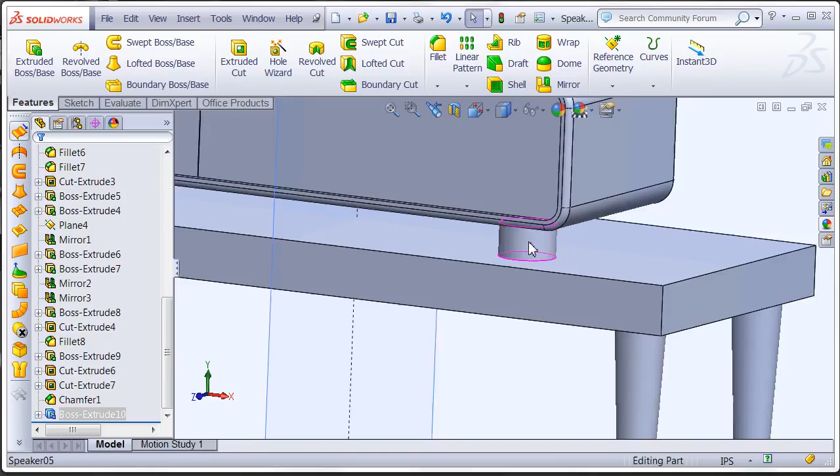All right, now that we have our receiver mostly built, we're going to finish the details. Let's fillet this leg, and we're going to mirror this to complete the rest of the ones under the body of the system. Go ahead, hit OK.

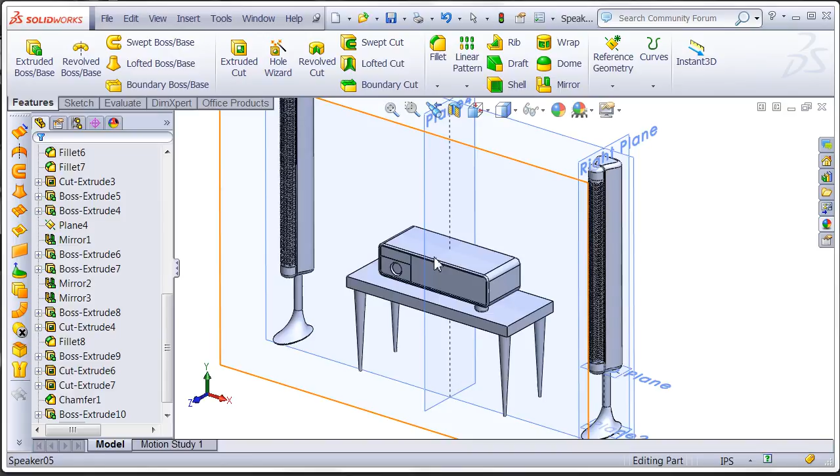Now we're going to mirror that off of the plane we made for the receiver. Go ahead and hit mirror. Pick your plane. Now we're going to do the body, not the feature of that fillet. Go ahead and pick that. Okay.

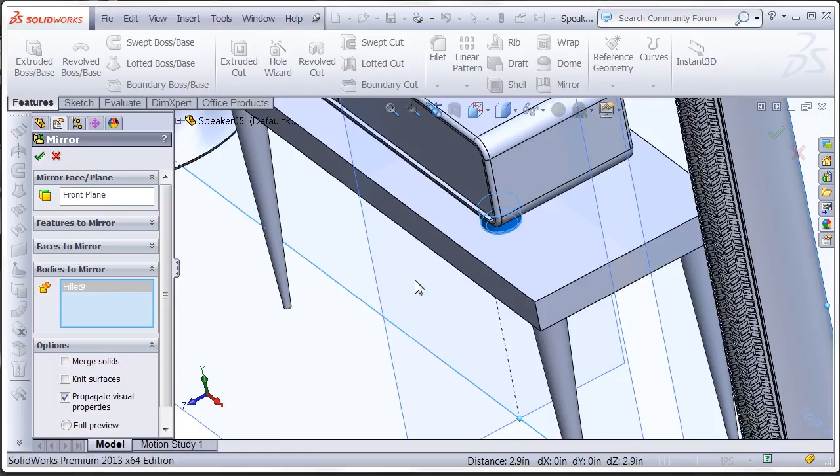And now we have our foot there. It looks like it's a little off. Okay, there's a way to fix that. We can always just delete that.

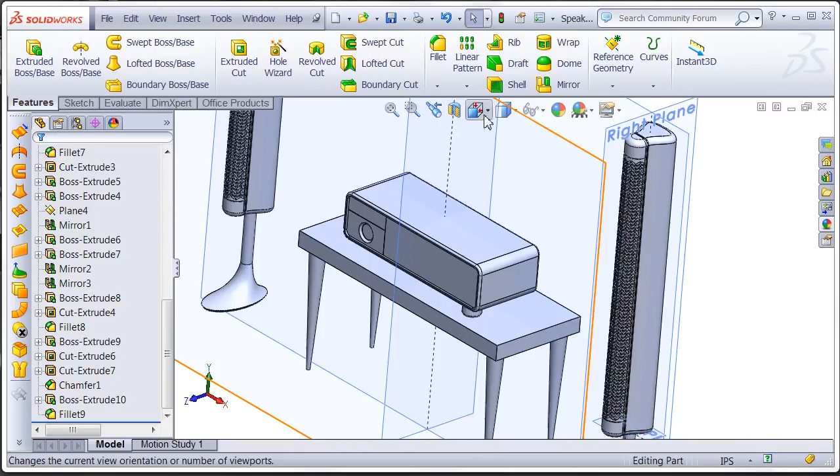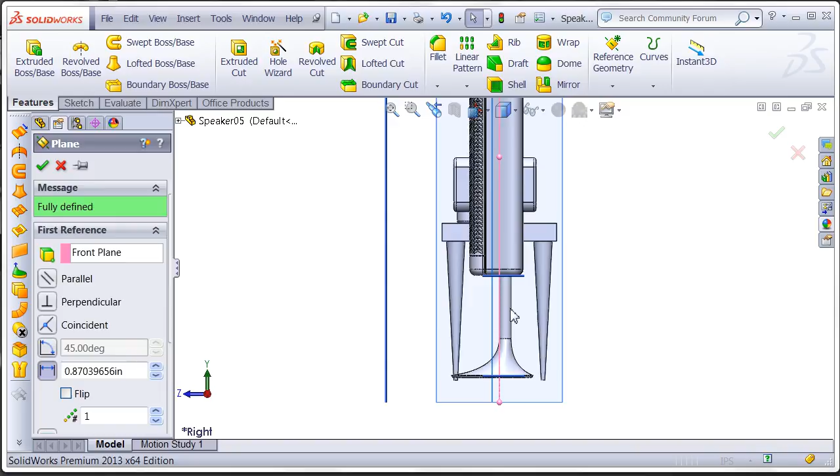Now what we're going to do is a side view. We're going to open up a second plane. Let's go ahead and grab one really quick. Pick a good center area of where that receiver is.

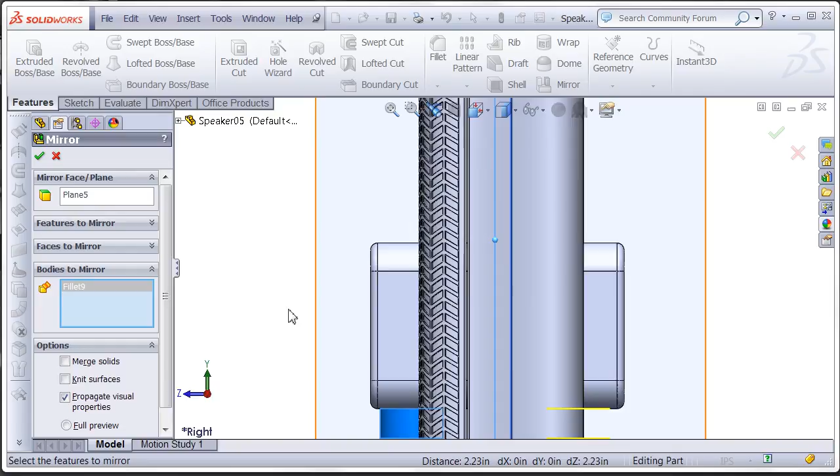That looks pretty good. Go ahead, hit your mirror feature again. Pick your body. And now it's nicely mirrored.

Now we're going to do that again using one of the planes coming from the side, and we're going to go into the front view to achieve that. So let's go ahead, open up another plane, again holding that control and just dragging over to where you want it. That looks pretty good.

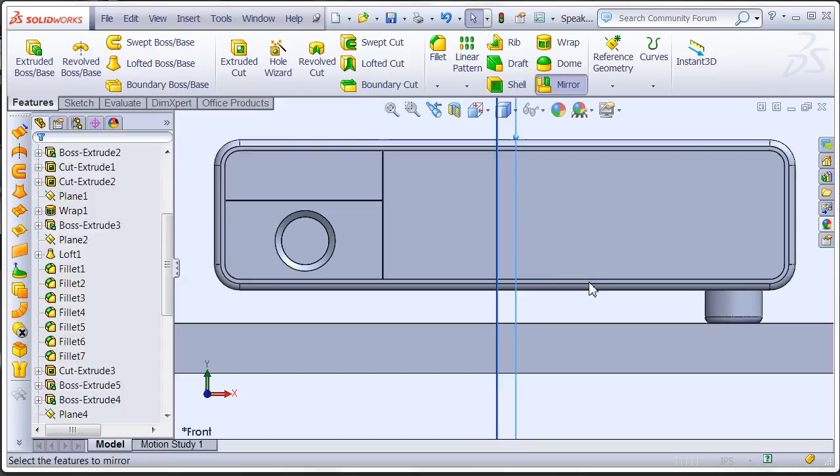Hit mirror. Now we're going to select both of these. And to adjust that, we can simply change that plane so we can make it look as symmetrical as possible. Let's go ahead and do that really quick.

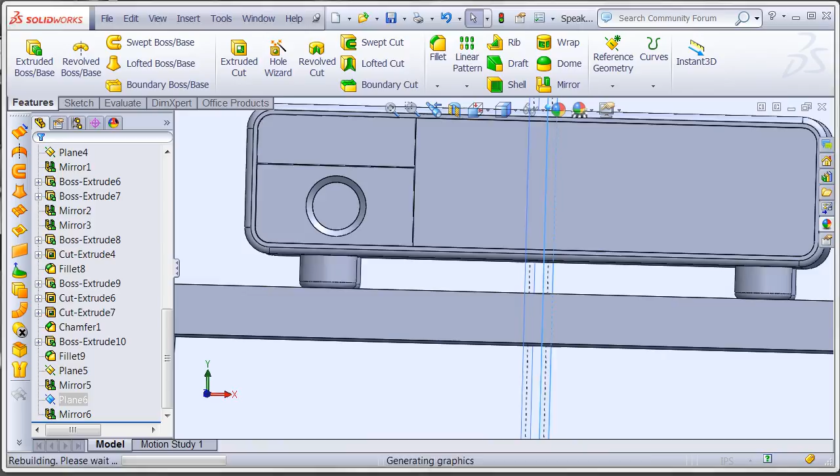All right, so let's minimize that. That looks pretty good. Yep, and that'll work.

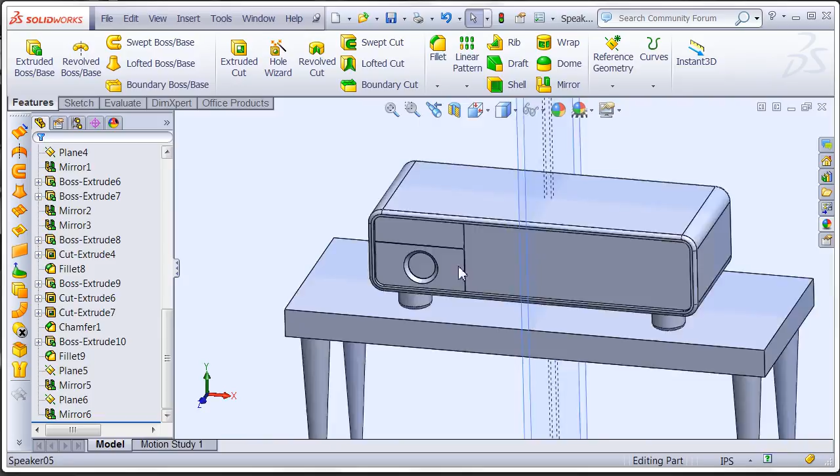Okay, so now we're going to extrude a knob here for the front. Go ahead and open up a sketch there. Again, using your same geometry that's right there, we're just going to offset right off of that. Hit OK.

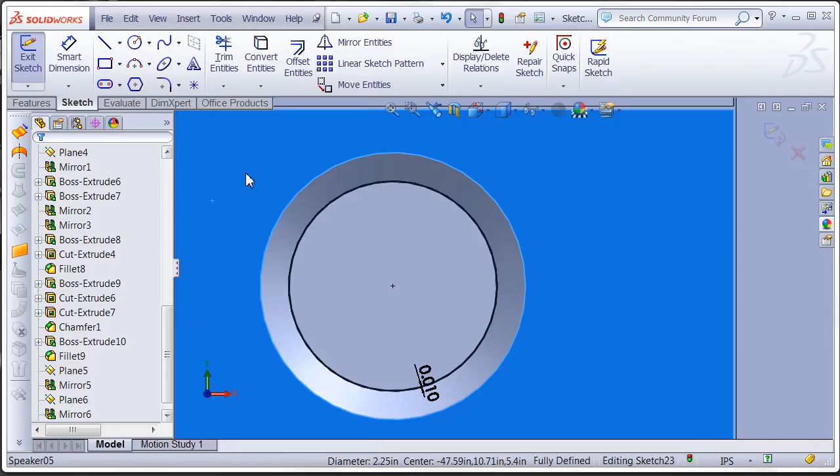And then we're going to use our extrusion button. Maybe a little bit less depth than that. And again, we don't want to mirror it. We want it to be another piece. So go ahead, hit OK.

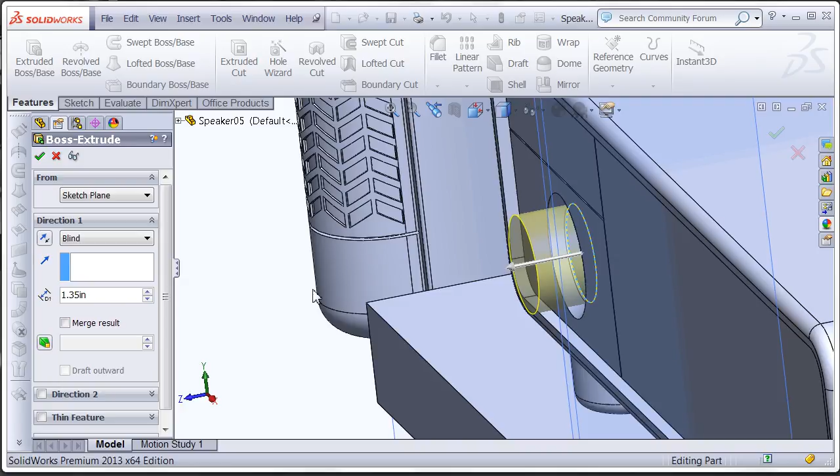Okay, now we're going to fillet that front edge. Maybe not too much. All right, let's hit OK.

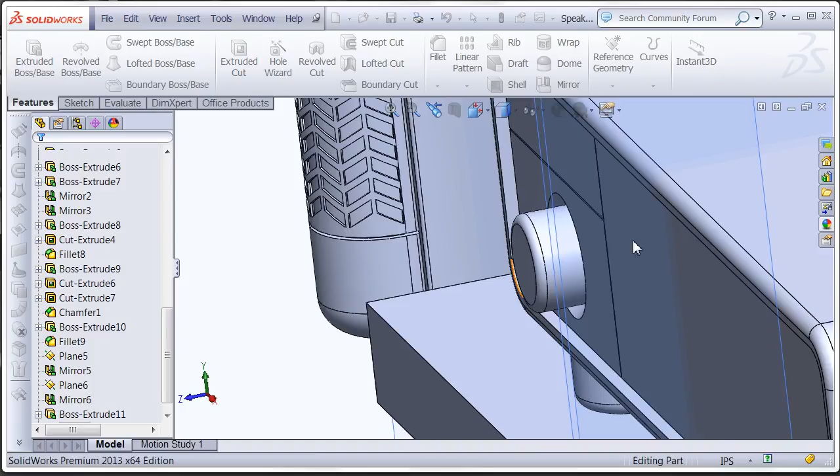Now we want to cut off that front. We want to make this two pieces. We're going to have a little grip area, and then the front's going to be separate material. So let's go ahead and use some of our references that are close to that. We're going to make a cut straight from using that tabletop.

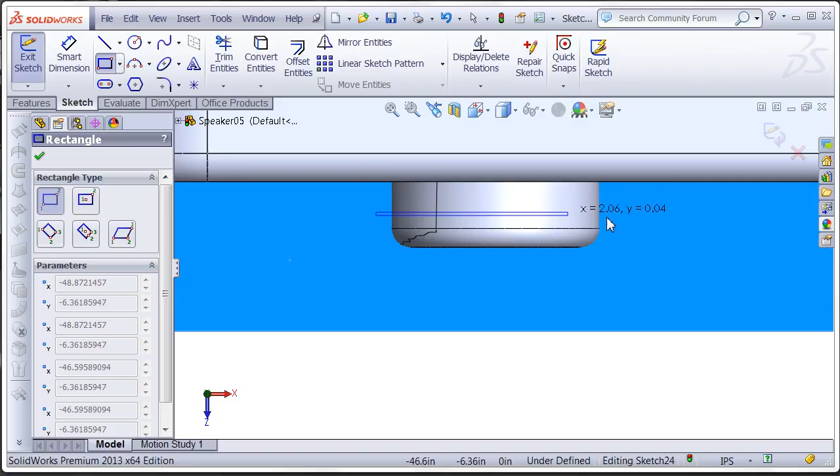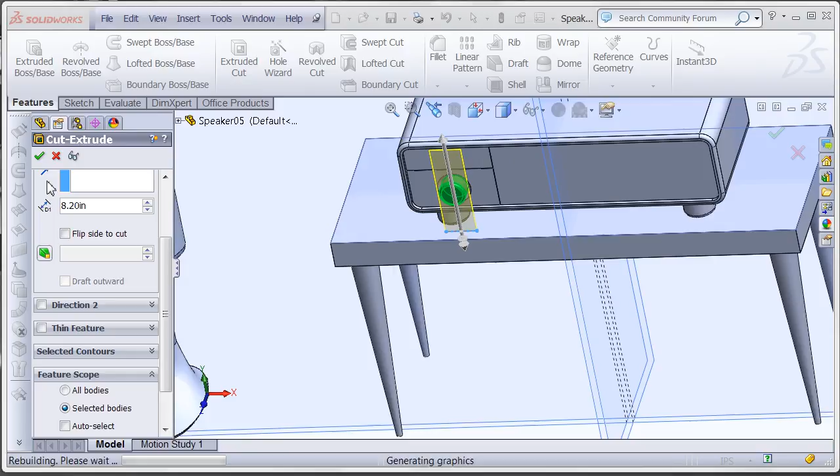Go over here, use your rectangle. And we're going to extrude cut that really quick. And again, make sure you're picking the right solid when you're doing that. Hit OK. And that should be good.

Now what we're going to do is put some chevron patterning on this piece. We want it to look like the rest of what we designed over here.

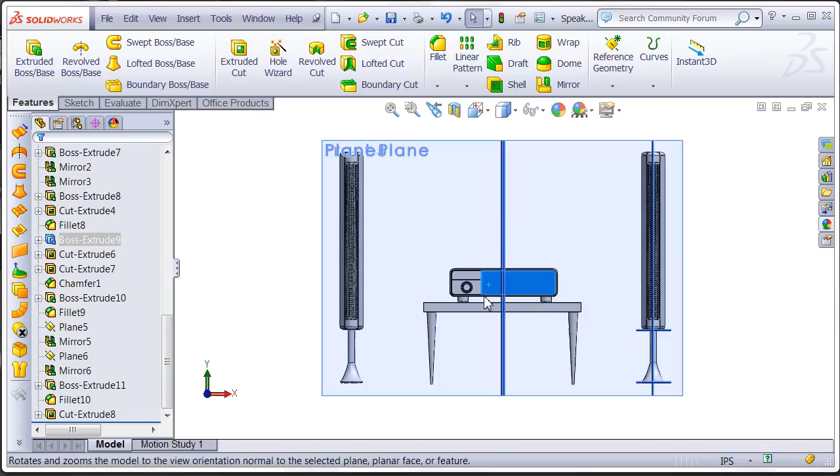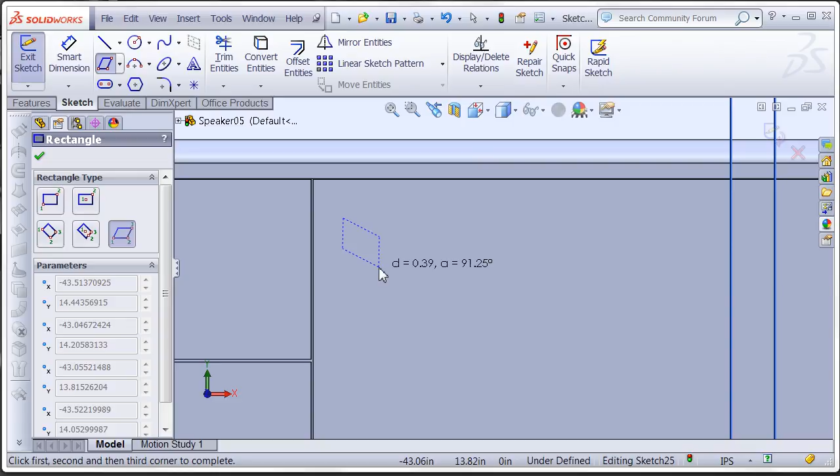So go ahead, come over here. Let's do the same thing that we did before. And again, you're going to need a reference point. So for construction, go ahead, make a center line.

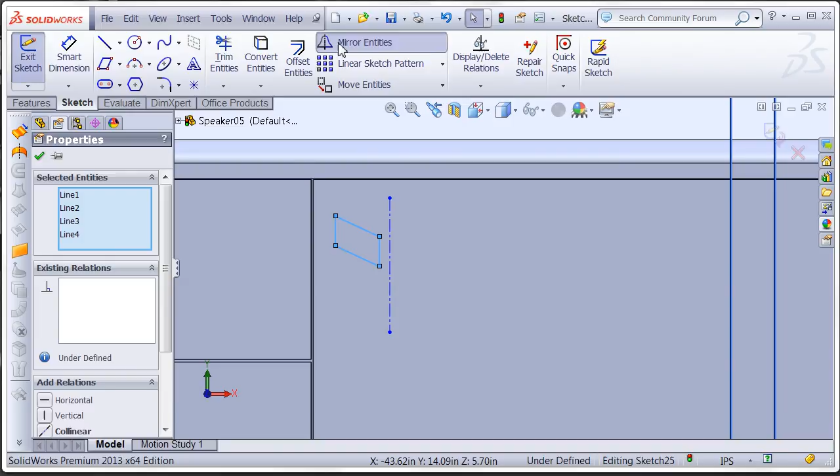Again, go ahead and mirror this already, because once you mirror it, you can still come in here. We can change this and make it how we want it to look. So go ahead and play with this a little bit. That looks pretty good.

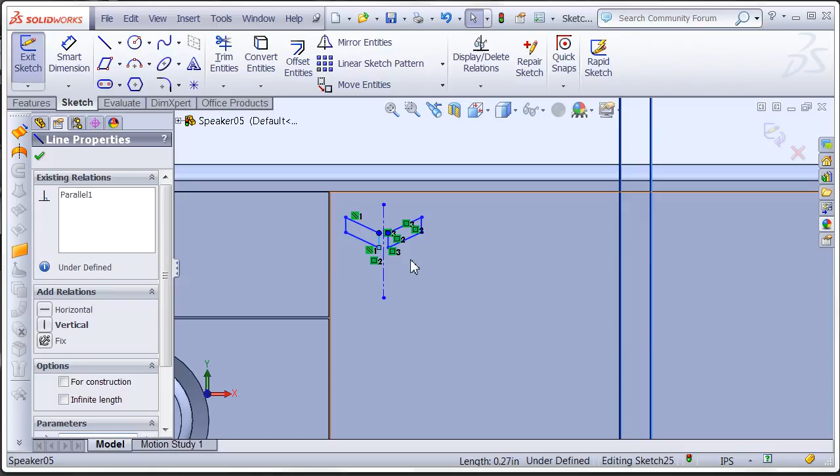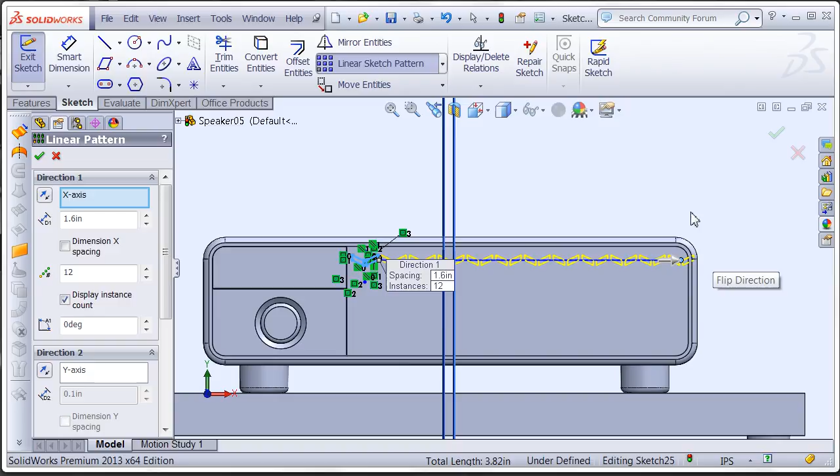So now select all of this. Make sure you're not selecting that center line. We're going to do another pattern, and make sure it extends all the way out. In this case, this is going to be all right. We're going to end up just cutting off the extra pieces we're not going to use later. So go ahead and hit OK.

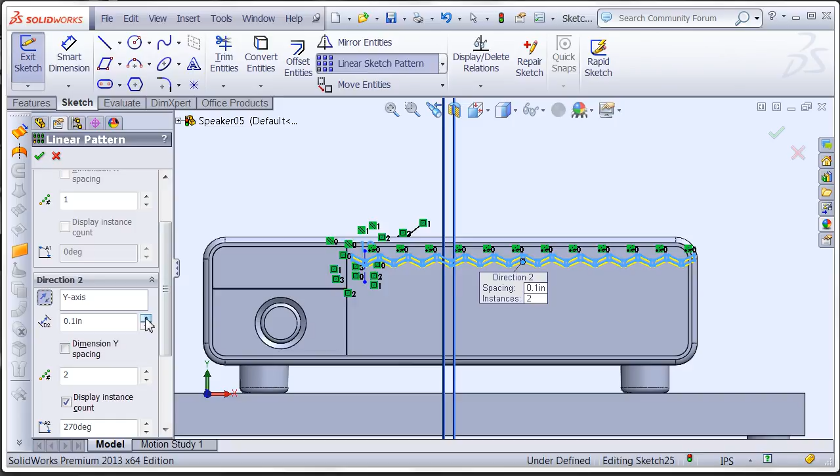Select. Now we're going to pattern downward this time. Reverse that. Make sure we have good space in there. That looks pretty good.

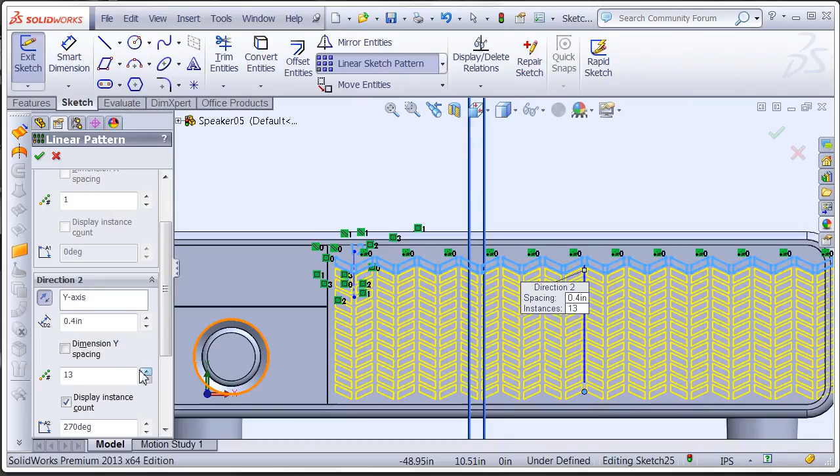Might do one less. We'll do one more. Okay, so go ahead and hit your check mark.

We're going to come over here. We're going to get rid of these extra pieces that are kind of coming off the side. So select those and delete them.

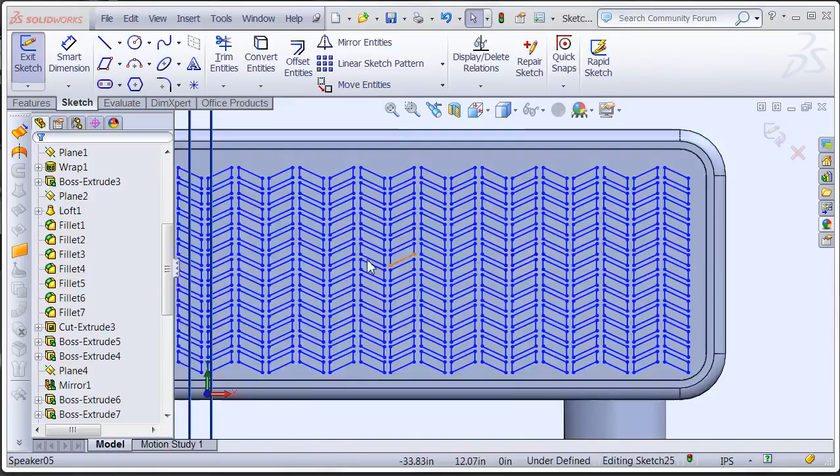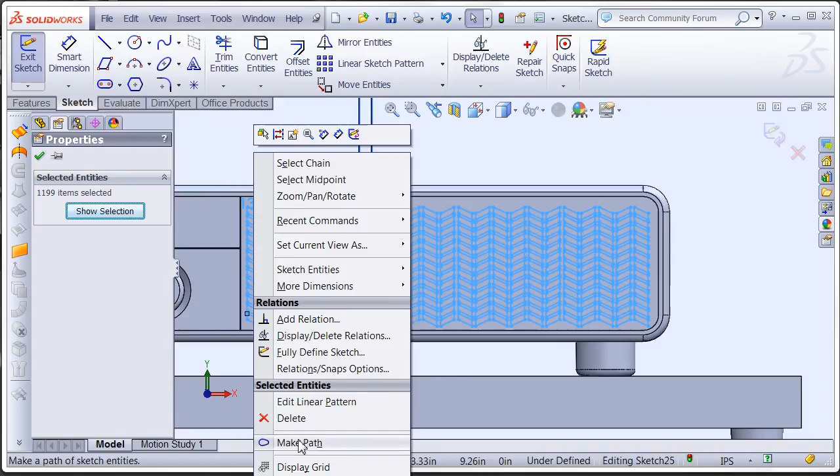We can also come back in here. We could really move these around to where we want them to sit on that plane. So let's see. Go ahead and right click. You can hit move entities.

So this process is going to take a while, so I'm going to pause right here and then we'll come right back as soon as it's ready.

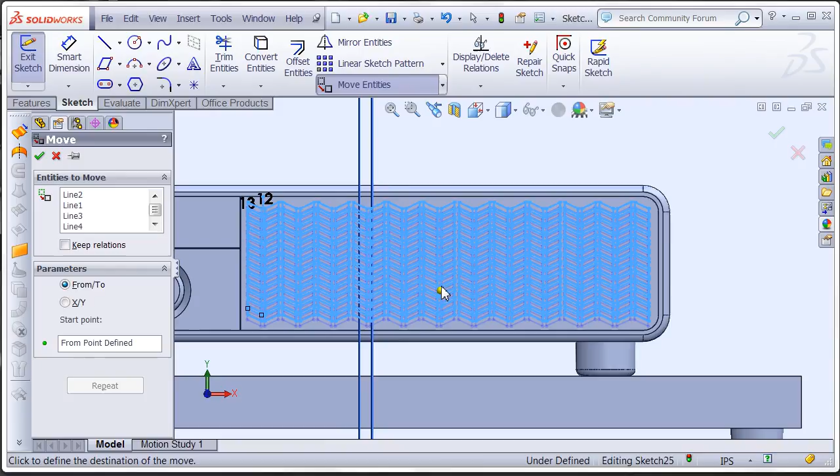So what you really want to do though is pick a point, then it'll start dragging around with your cursor. That looks pretty good to me, and exit the sketch.